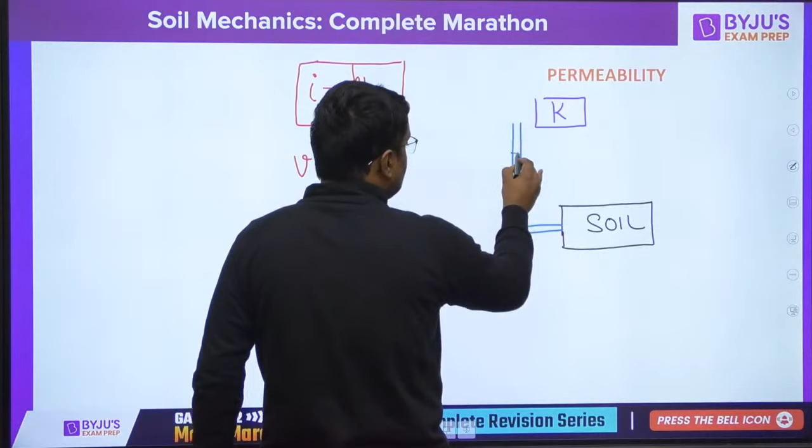Guys, suppose this is a soil sample, and the soil sample is connected by a water head here. Suppose the head of the water is H1, the height is H1, and here suppose the height is H2. So there is a head difference. Here the energy is more, H1; there the energy is less, H2.

See how the energy is more, sir. I am not getting, sir. Suppose let us take this as datum. Let this be datum. So consider any point, let it be this point. So velocity head is always 0.

Velocity head in soil is always 0, because if it is at rest, velocity is 0. If it is moving, then velocity is very, very small, not like Usain Bolt - velocity is very small, about 10 to the power minus 8 meter per second. So velocity head is 0. Even if it is moving, in soil we always take velocity head as 0. Datum head, the height from datum, is 0.

Pressure head - see how much is the pressure? Gamma H1, so pressure head is H1. So total head here is H1. Okay sir, got it sir.

Similarly, at this point, velocity head is always 0 in soil. Datum head, height from datum, is always 0. Pressure head here is H2, height of water is H2, so pressure head is H2, total head here is H2. So total head here is H1, total there is H2. Water will flow from H1 to H2.

Water will flow from H1 to H2 - sorry, from this point to this point. Why? Because there is an energy difference. Here head is H1, there head is H2. So there is an energy difference, therefore water will move.

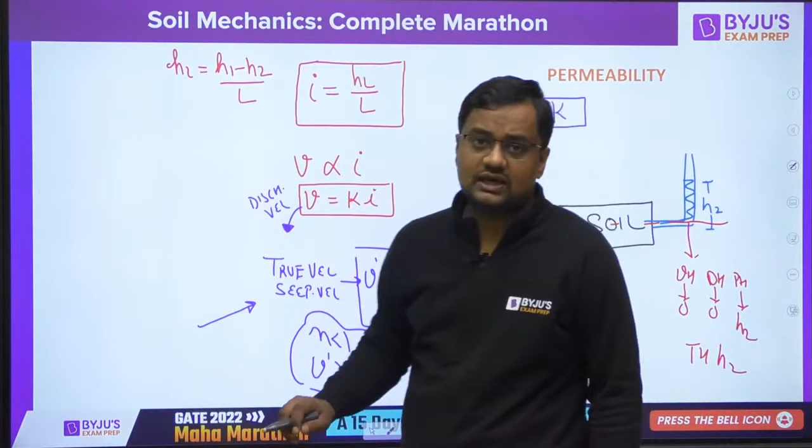What is the difference between the two? Guys, discharge velocity is actually discharge by total area. Real velocity is true velocity, because actually the true velocity is discharge by... if water is not flowing from the whole area.

Water is not flowing from the whole area - water is only flowing through the voids. If this whole area is not empty, this is not a pipe, the whole area is not empty, water is only flowing from the voids. So it is Q by area of voids.

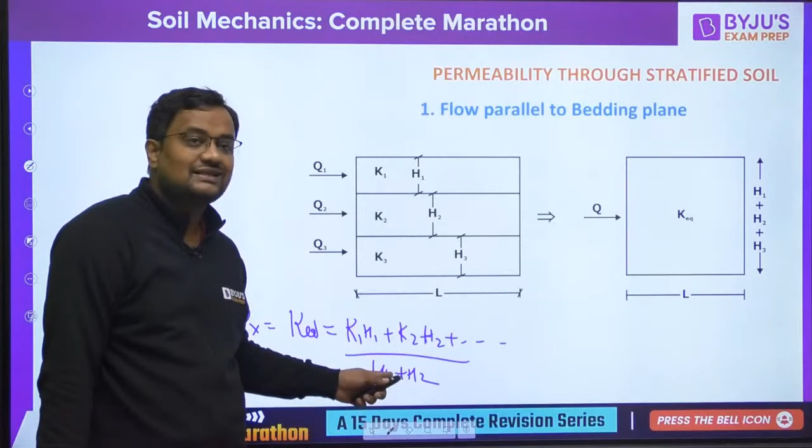This is Ky, and always, Kx is greater than or equal to Ky. Parallel is always more than perpendicular. Why? Because parallel is something like an arithmetic mean: K1 plus K1 plus K1... H1 times, plus K2 plus K2... H2 times, upon total number of terms, that is just like an arithmetic mean. And here it is a harmonic mean. So arithmetic mean is always greater than or equal to harmonic mean.

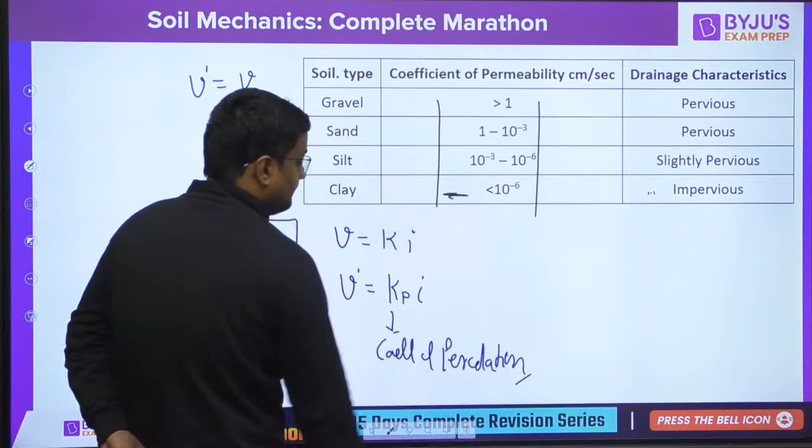So if we are relating V, that is discharge velocity, which is discharge by total area, and V dash, true velocity, is discharge by area of voids. If you are relating discharge velocity with I, that gives coefficient of permeability. And if you are relating true velocity with I, that gives coefficient of percolation.

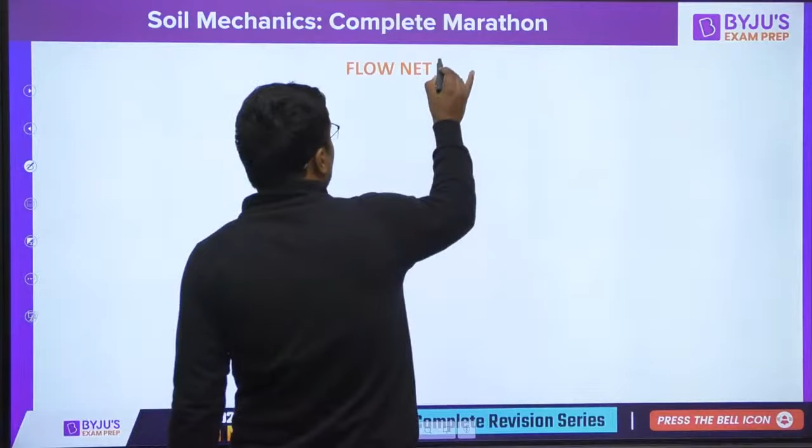Now flow net, very important, and as it is very important, I am deriving it. I am showing you the complete figure, please be patient, please listen very carefully. First of all, before flow net, let me tell you one more thing here.

Critical gradient is equal to G minus 1 upon 1 plus E. What does this mean? At this gradient, if there is upward seepage, sigma bar net is equal to sigma bar plus or minus HL into gamma W, plus for downward seepage, minus for upward seepage. Please understand the whole mystery that I'm telling you here.

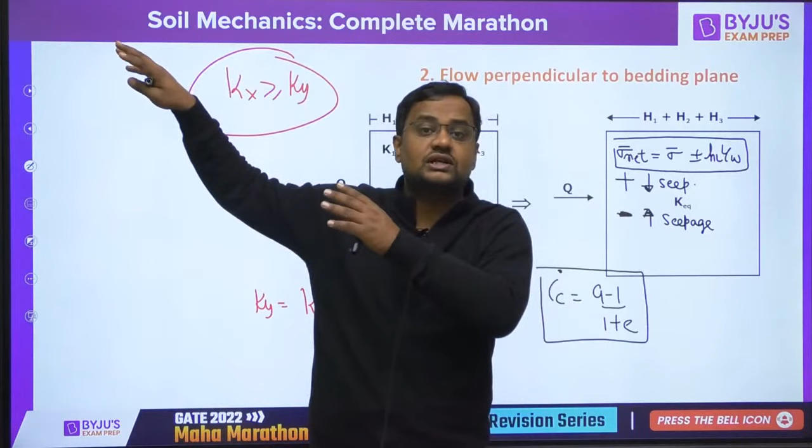Guys, this sigma bar is what we studied yesterday when there is hydrostatic condition. When there is hydrostatic condition, this sigma bar is the effective stress at any point. Or I can write sigma bar old under hydrostatic condition. When water is moving or when there is seepage, then effective stress is not the old one.

See, guys, suppose there is ground level and suppose there is water. Suppose gamma sat is equal to 20, gamma w is equal to 10. This is 2 meter. Everybody please reply. What is the effective stress at point P? Gamma sat 20, gamma w 10. This is 2 meter. So gamma submerged will be gamma sat minus gamma w, it will be 10.

Now effective stress at point P is equal to gamma submerged 10 into 2, that is 20. This is right when no seepage, that is hydrostatic. And this answer will be wrong in seepage condition. In seepage you cannot write effective stress 20. So gamma submerged into H, 20, is correct when there is hydrostatic condition. Unless nothing is mentioned in the question, you have to assume hydrostatic. If there is seepage, the answer is not correct.

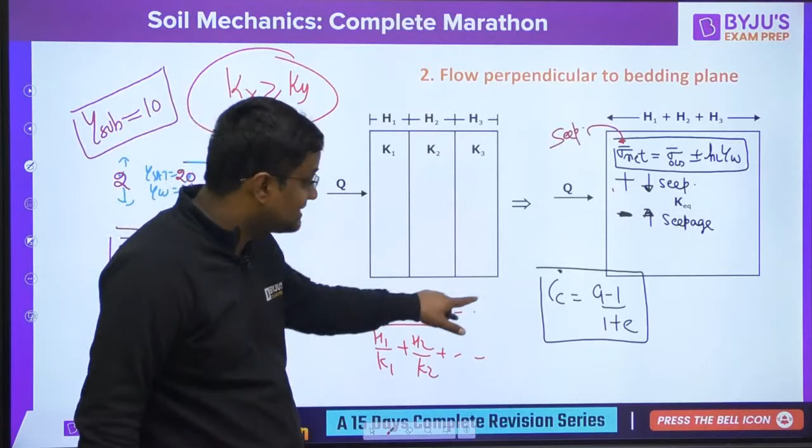And at this gradient, I am not going in derivation, effective stress is 0. So there is no contact, quicksand condition. That time, effective stress is 0. Quicksand condition, piping failure, anything. And factor of safety is critical gradient by this. Okay, now coming to here, everybody, very, very important.

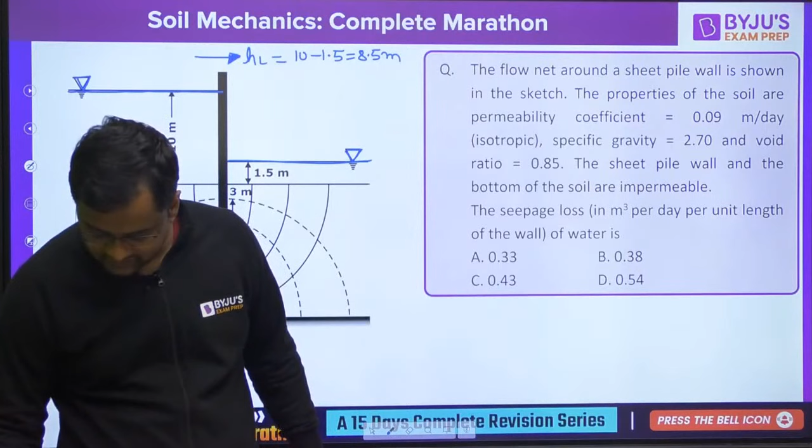Let me explain you here in this figure only. Suppose there is a sheet pile and water level here is this much and water level here is this much. So there is a head loss of how much? Here 10 meter, here 1.5 meter. So head loss of 8.5 meter. Getting or not? Everybody got it? Great. So whenever there is head loss, water will move.

Guys, not only water, everything in this universe goes from high head to low head. So from high head to low head, water is moving, like this. Water is moving. So these are flow lines. Let me make that with a different color. These are flow lines.

So number of flow lines are always 2 extra. See, this also you have to make a flow line, and this also. So these are flow lines, and number of flow fields. So number of flow lines are how much? 1, 2, 3, 4, 5. So this is 5 minus 1 is equal to 4, number of flow fields, that is NF. Or either you don't want to see in this way.

Yes, Shakti. Yes, Shakti.

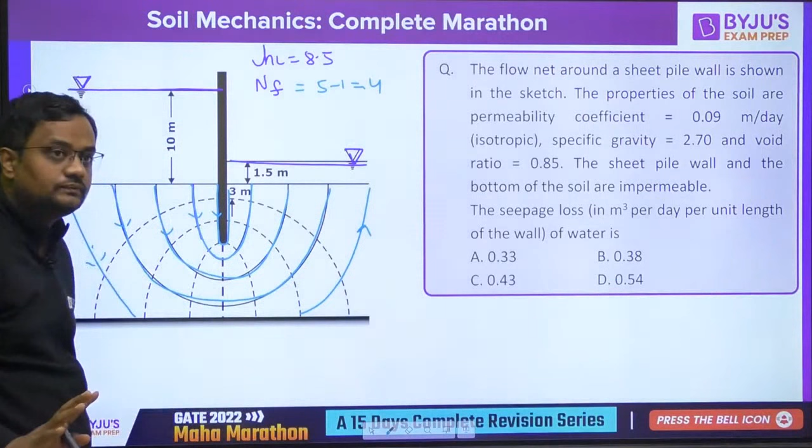Lines is 1 flow line. Water is going here now from high to low pressure, high head to low head. Water 1, 2, 3. Make 2 extra. Here, and this extra. So 1, 2, 3, 4, 5. 5 minus 1 is equal to 4. Either this way you can do, or another way is 1 water going from here, here. 4 ways. Number of flow field 4.

Equipotential line. Make 2 extra. This and this. So number of equipotential drop. So lines are 1, 2, 3, 4, 5, 6, 7, 8, 9. So 9 minus 1 is equal to 8. Or another way is from here to here 1 loss, then second loss, then third, fourth, fifth, sixth, seventh, eighth. 8 loss like this. Any way you can do. Understood everybody?

Now the question is the seepage loss. The seepage loss is given by K into H into NF by ND. K is given. H is 8.5. NF and ND is given. Calculation, I am not wasting time. PM, you can see my seepage chapter. I have taken the most complex problems and I have solved them by 3 methods. You can see that there.

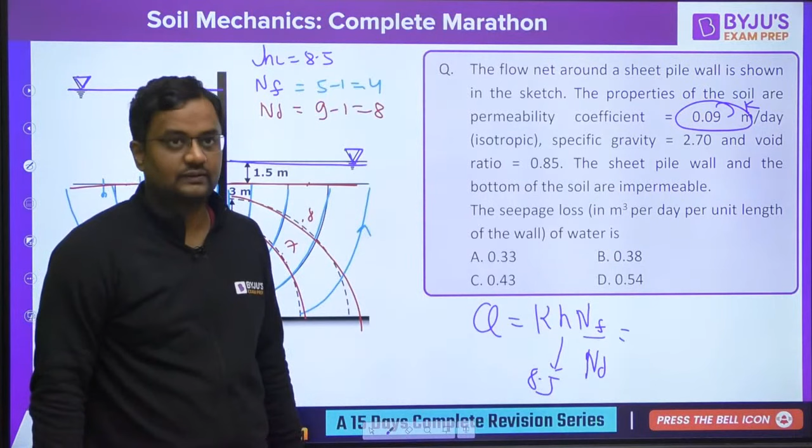Have you understood, everybody? Okay, whatever is the answer coming. Any doubt? Enjoyed the Flownet? That whole jal, that whole net is called Flownet. That is obtained from the solution of the Laplace equation. Everybody, have you understood all?

Enjoyed? Now this one, the value of critical hydraulic gradient. IC is equal to G minus 1 upon 1 plus E. IC is always equal to 1, guys. Not exactly, but around 1. Why? If 1 is not coming in your exam, that means you are doing some mistake. I am very sure that it will be around 1. How am I very sure?

Because see, G is around 2.6 to 2.7 and E for sand is around 0.6 to 0.7. So here 2.6 minus 1 is around 1.6 and the denominator is also 1.6. That's why, guys, it will be around 1. Everybody, please let me know, have you enjoyed or not? Understood or not? Any doubt?

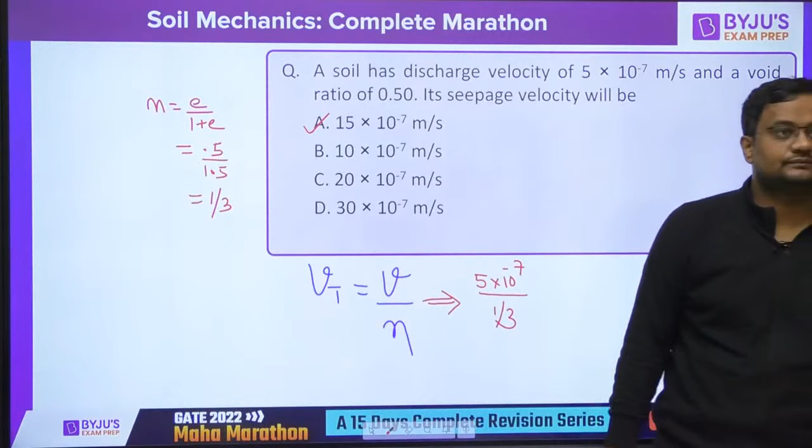Excellent. Excellent, friends. Okay. Any doubt if anybody is facing here?

So guys, what we have done till now: effective stress, compaction. Vertical stress, see, two chapters that are very less important I will not be taking in this marathon. Might be after GATE we can take them, because for GATE they are not important. Seepage, permeability, effective stress, compaction we have done. We have done proper phase diagram also. These two things I am not talking about because they are not very important for the GATE exam.

Hi Julie, after a long time you are here.

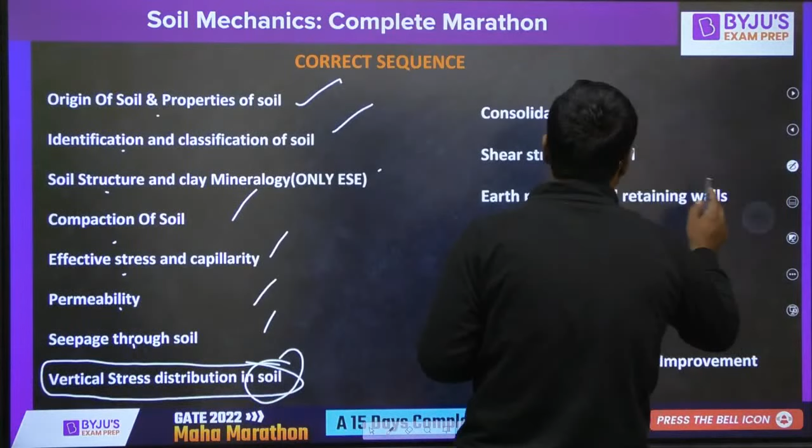Okay, so now the remaining thing we'll be doing here. Soil exploration also we will not be doing, because it's not very important; only the area ratio formula is required there. Okay, so ready for consolidation?

Should I increase my speed or decrease my speed, everybody? Please let me know. Increase or decrease? Increase, Shakti Singh. Little increase. Okay. What about others? Increase.

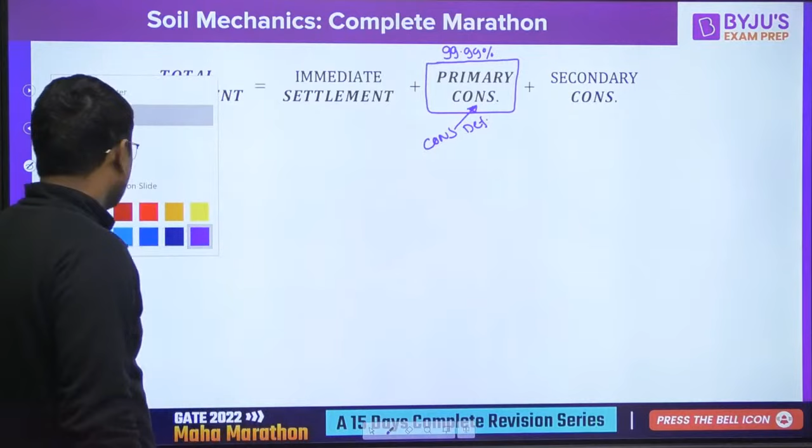Suppose this is my soil: solid, water and air. And suppose Joshi sir is putting his weight here. Joshi sir is sitting here in front of me. He is doing gym these days, gained so much muscle. So he is compressing it. Now, solid cannot be changed. There is no person in the world that can reduce the solid. So guys, some air will be compressed.

Some air will be compressed. That is called compaction or immediate settlement, SI, or immediate settlement.

Now if Joshi sir is with his friend, important friend, and they are putting more weight, let me just correct it. Okay, Joshi sir? Now, where is pink color? Okay. So let it be now more weight. So more weight now. So this air void, theoretically, I am assuming all air voids have gone. Practically, guys, out of the millions of air voids, 1 or 2 will be there.

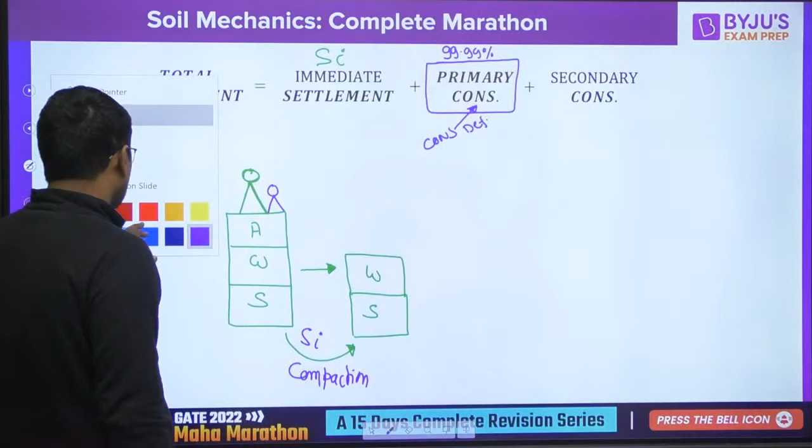So, with sufficient amount of load, practically out of millions of air voids, few will be left. You are not Rajanikanth, but theoretically I am assuming all air voids have been removed by sufficient load. So this is called immediate settlement, SI, or this is called compaction. Why is it immediate? Because the compression of air voids will take no time. Now if again some load is applied on this, now it is saturated soil.

So first step is what? Compaction. That is why in any coaching across India, the first thing taught should be compaction. That's why I told you compaction in part 1 and consolidation in part 2. In a partially saturated soil, always the compaction will be occurring first.

No. Sandhu, my favorite is Shahrukh and Nana Patekar.

So always compaction will be occurring first. Now the load is applied again. There is no air. It is saturated soil now. All load is taken by water, and water comes in excess pore water pressure, and the solid will not be changed. Excess pore water pressure develops, and water starts dissipating. So here the volume change is consolidation.

Consolidation, also called primary consolidation, that is SC, and then there is secondary consolidation, SS. So removal of air is a very fast process, compaction, immediate, and removal of water is consolidation, that is a slow process. Compaction is immediate. Consolidation will take 3 years, 4 years, 5 years, 6 years, 7 years. Consolidation will take much time.

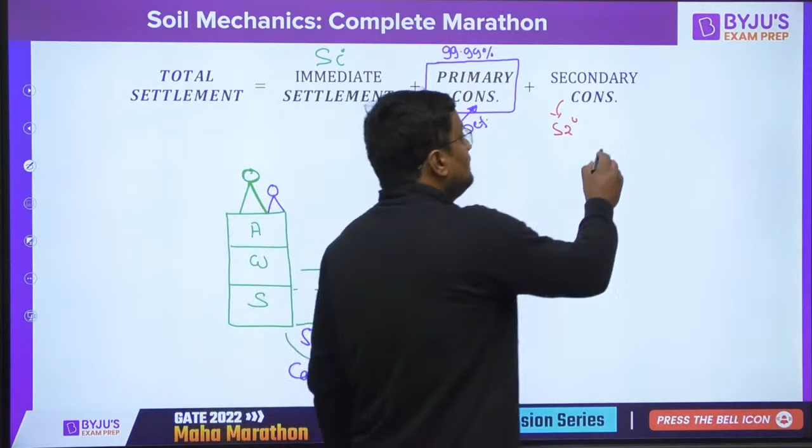Why will consolidation take much time? Because the water moving speed is 10 to the power minus 7 centimeter per second, 10 to the power minus 9 meter per second. Very slowly water is moving, not like Usain Bolt clearing 100 meter in 9.6 seconds. So here this settlement is consolidation. Then what is secondary consolidation? That is only feasible in plastic soils, and it is rearrangement of particles.

Guys, have you ever gone to a village? Joshi sir, have you ever gone to a village? Yes, Joshi sir has gone. In the village, when you take wheat, you go to the, what do we call chakki in English? Mill. Okay, a mill or something to crush the gehu, the wheat we obtain from the farms, to produce flour.

Suppose we put that in a sack, in a poly bag, and we are not compressing it, we leave it as it is. Due to its self weight the particles will rearrange, that is secondary consolidation. Due to self weight particles will rearrange in a denser form.

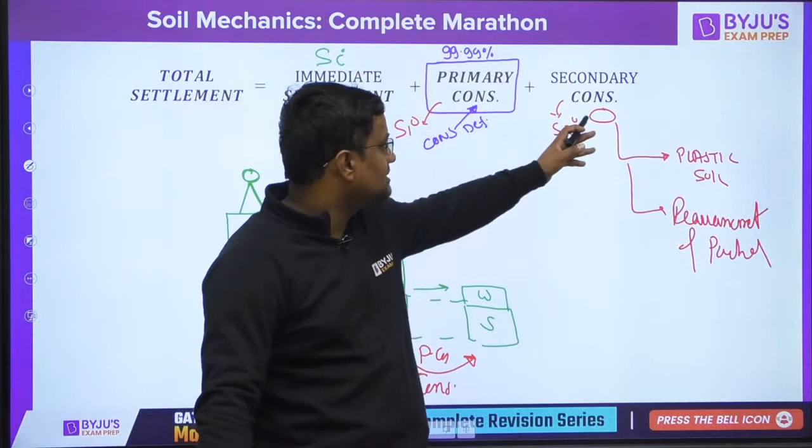Guys, these things have an empirical formula that is never going to be asked in GATE. Out of the last 30 years, it was asked 0 times, and this one 1 time. So whatever I am telling you about consolidation after this, everything is primary consolidation, that is removal of water. That is the formula for immediate settlement, that is compaction, but that is not at all necessary.

So guys, in SOM, every time we assume the material is homogeneous, isotropic, and Hooke's law is valid. Similarly, in soil, we assume soil to be semi-infinite. We always measure the depth of clay, depth of sand, depth of gravel. We never measure the area.

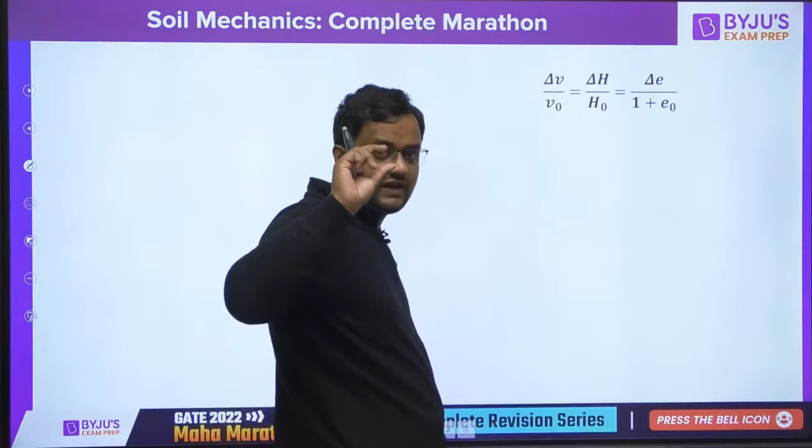Now the NCC soil. What is NCC soil? NCC soil means earlier in the soil a very thin person was sitting, and now suppose Great Khali is sitting in the present, and the past was a very thin person. That is NCC soil. NCC soil means today's stress is maximum. So OCR value is less than or equal to 1. Present stress is more.

OCC soil means in the past Khali was sitting, and now past stress is very much and today's stress is very less. And OCR value is greater than 1. The maximum stress in the past is more. Okay, what difference this will make, I'll tell you.

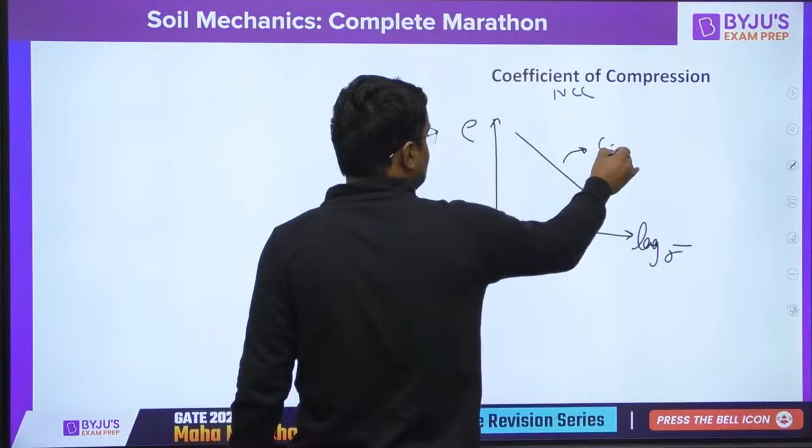Coefficient of compression, guys: if we make the same thing with log scale, then for NCC soil this is a straight line and its slope is CC. Guys, what is the difference for OCC and NCC? For OCC soil, the graph will be like this, and the slope is CR. OCC soil means the maximum stress has been applied in the past, and today's stress is very less. So it will not cause much settlement. In NCC it will cause settlement, because the past was very less.

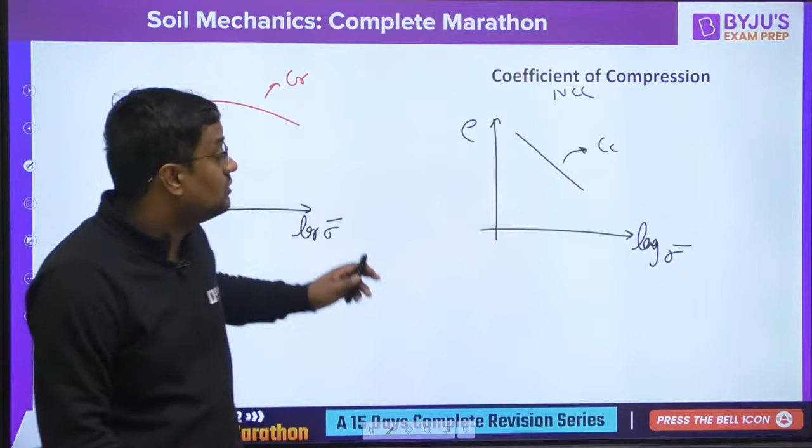And see, in this bag you fill wheat, and a very small kid, a 3-year-old, is applying the force; it will not compress much. Then I come and compress, so the settlement will be more. But if I have already applied the force in the past, and now a small kid applies force, that will not cause much settlement. Similarly, here void ratio will not change much; E is changing very slowly. Here E is changing very fast. In OCC the high stress was already applied in the past, so settlement will not be much. That coefficient is called coefficient of recompression, CR, the slope for OCC soil.

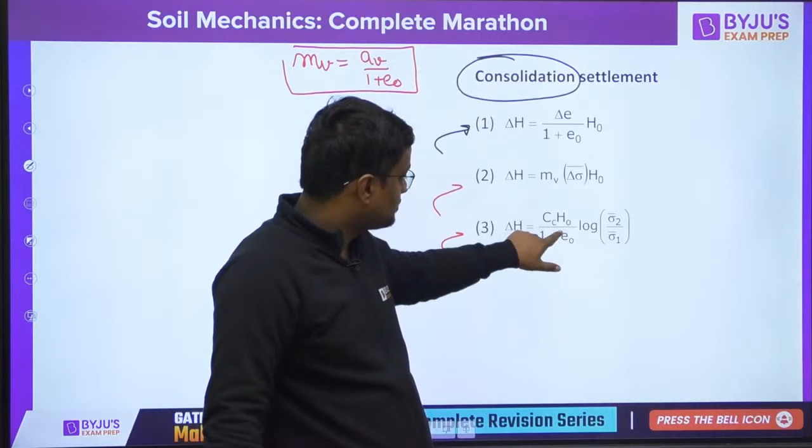Okay, so these are the formulas of delta H for primary consolidation: 1, 2, 3. Guys, what is MV? MV is coefficient of volume compressibility, equal to AV upon 1 plus E naught. Delta H is settlement, H naught is initial height, delta E is change in void ratio, E naught is initial void ratio. CC is the coefficient of compression. And the change in sigma bar has to be calculated at the center of the layer. Suppose this is a clay layer of 5 meter where I want settlement; then delta sigma bar I will take at 2.5. So these are the formulas for consolidation.

Now guys, one more thing. Since consolidation is a time taking phenomenon, if I want to find at what time what is the settlement, then TV is equal to CV into T by D square. CV is coefficient of consolidation, that is K upon gamma W into MV. From this formula 2 or 3 times questions have been asked in GATE. They have given that MV of two soils are in some ratio, permeability is in some ratio, so find CV. Very simple: CV is equal to K upon gamma W into MV.

TV is time factor that depends on degree of consolidation, capital U. Now what is capital U? See guys, if total settlement has to be 10 centimeter and it has settled up to now 3 centimeter, that means 30% is the degree of consolidation; 30% has occurred.

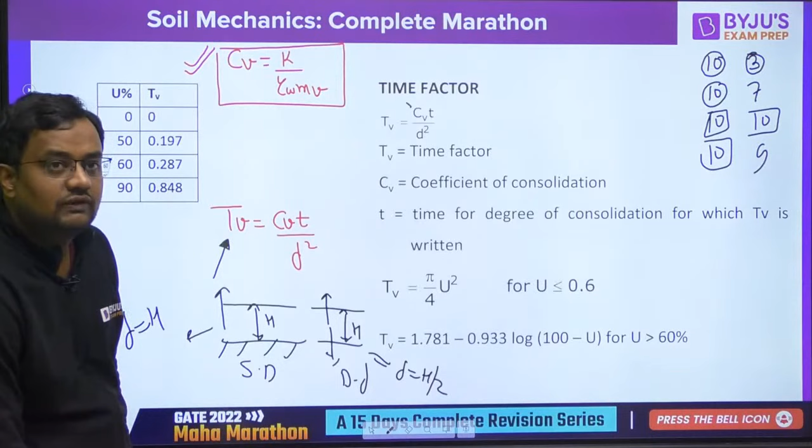If this height is H, so D here is equal to H, and D here is equal to H by 2, in double drainage. Yes, for same degree of consolidation, the TV is constant. So TV is, I told you, TV for less than 60% is this, for greater than 60% is this. CV is a thing that depends on soil. T is the time, D is the drainage path, single drainage it is H, double drainage is H by 2.

Now what time is this? Guys, if you are writing TV for 30% degree of consolidation, this time is the time for 30% settlement to occur. If TV you are writing for 80% degree of consolidation, so this time will be for 80%. If this TV you are writing for 90% degree of consolidation, putting 90 here, so this time will be time required for 90%.

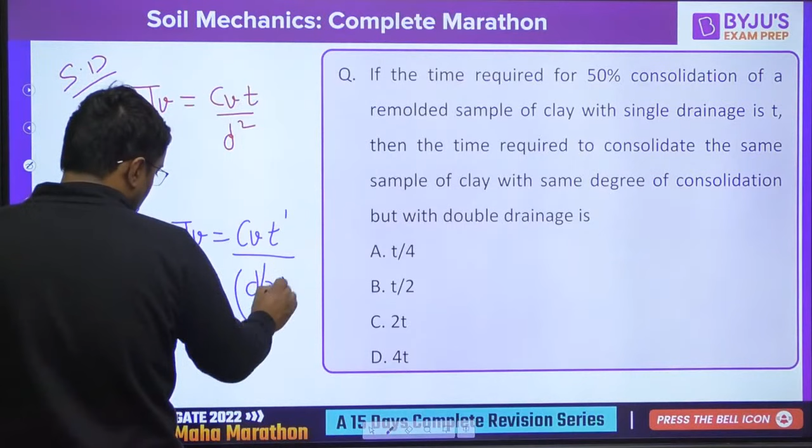TV is equal to CV into T by D square, when single drainage. Okay, that is single drainage. Now double drainage, TV is equal to CV into T dash by D by 2 whole square. Okay, now...

Everybody see, this will be 4T here. Okay, T dash will be T by 4. Double drainage time will require less, not 4T. Santu, it will not be double drainage time 4 times more. Double drainage time will be less, na? Wrong. Everybody is saying wrong answer. Sagar, Aman, wrong. Grishma, wrong. Santu, wrong.

Guys, in double drainage time you are saying more. In single drainage time is T. In double drainage time will be more. Naresh Meena.

Okay, great now. Okay, but guys, that is not very simple, na. It is not always like this, very simple. It is not so simple as you are thinking.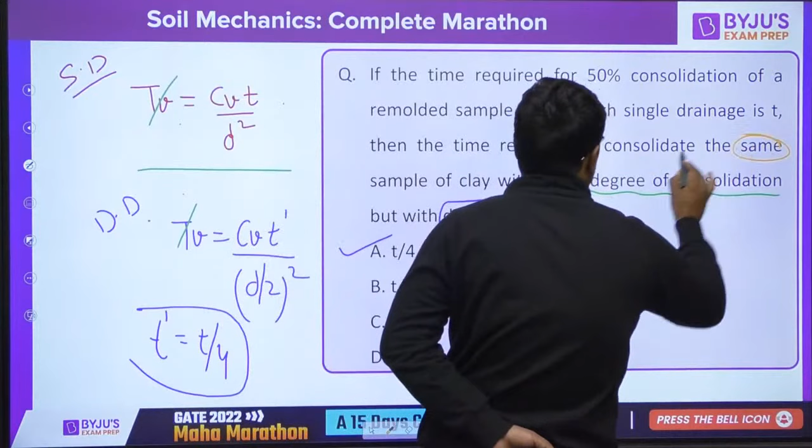Guys, here when you divide this thing, when you divide this and this by this, when you divide this by this, then since it is same degree of consolidation, since you have written this, that's why TV and TV is cancelled. Since you have written same sample, that's why CV and CV, because CV depends on soil. Okay?

So same sample means CV is also same and depth is also same, D and D. So always it is not T by 4 or 4T, it is not like that.

If here it is written as 60% consolidation and here it is 50% consolidation, here it is 60% consolidation, the answer will not be T by 4. If here it is 50% consolidation and here it is written 70% consolidation, the answer will not be T by 4. Then you have to make TV by pi by 4 U square here, and TV for 70% consolidation differently.

Understood my concept or not, what I want to tell? That is, it is not always that in double drainage it is T by 4 or single drainage is 4T. It is not as simple as that. Have you got it, guys?

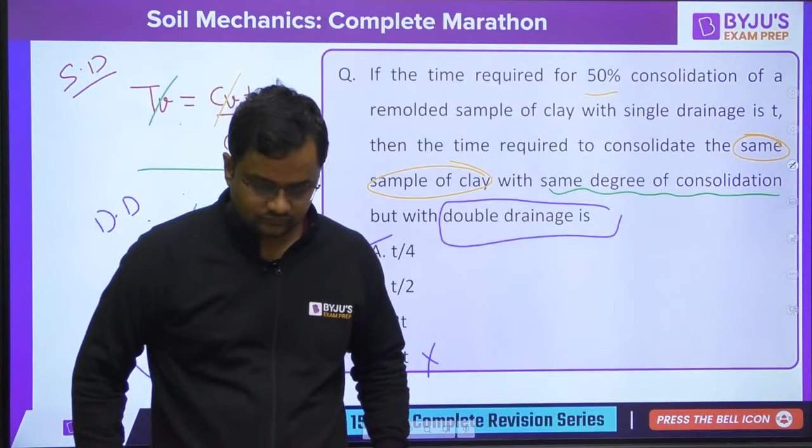Okay, so enjoying, guys, till now? Enjoying, guys, till now?

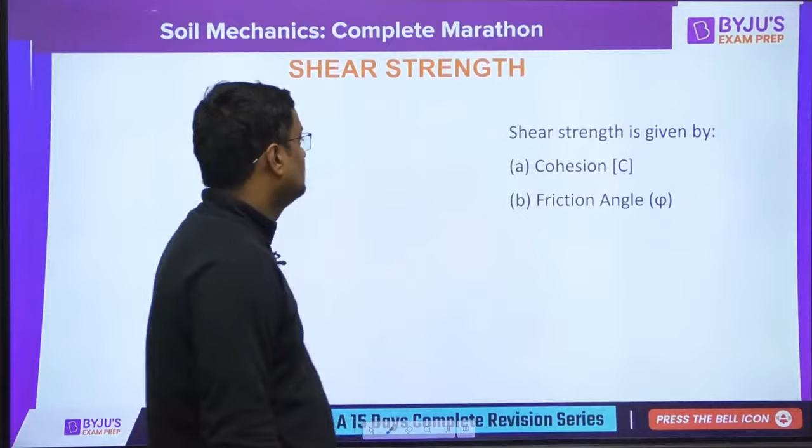Now, these landslide failures you always see — all these are shear failures, shearing of one wedge over the other. All these failures are shear failures.

So shear strength is given by C and phi: C plus sigma tan phi, or C dash plus sigma bar tan phi dash. If you have C and phi as total stress parameters, you use this. If you have effective stress parameters, that is C dash and phi dash, you use this, and this is a little bit more accurate. If you have everything, you should apply this.

Nothing to worry — when I was in college, I also didn't understand the difference between C and C dash, or between phi and phi dash. I also didn't understand, but let me explain it to you, you will understand.

Now, for clay, phi is equal to 0. Clay has a flaky shape, so there are not many angular things, so phi is 0 — there is no interlocking. So shear strength is equal to C.

Shear strength is equal to C for clay. For sand and NCC soils, since NCC soils also behave as sand, C is equal to 0. So tau is equal to sigma tan phi, or sigma bar tan phi dash.

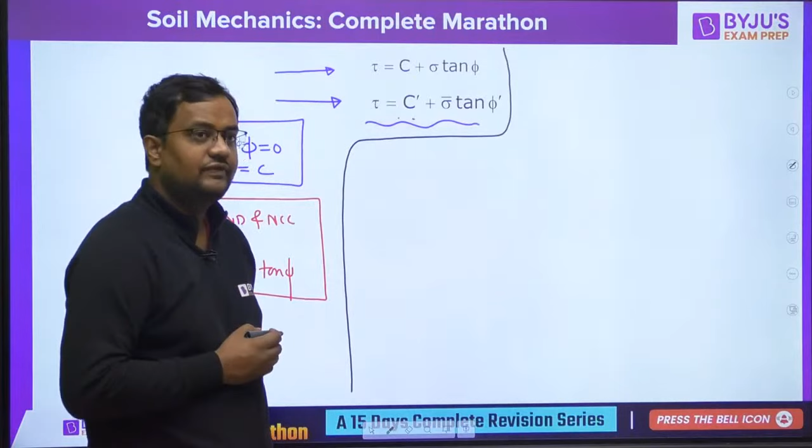Now, friends, please see, C and phi can be different for the same soil under different conditions. Let me tell you. Suppose this is soil and you are applying a confining stress from all around, upward, downward, everywhere. That is sigma C or sigma 3, spherical conditions. Now to break this, you apply sigma D extra, only in the vertical direction. The total becomes sigma 1.

Sigma 1 is equal to sigma D plus sigma 3. This green stress is from all around. Sigma 3 is also called minor principal stress, and sigma 1 is also called major principal stress. Now this sample becomes something like this. Sigma 3 was acting from all around, but we apply sigma D extra from the top, so sigma 3 plus sigma D is equal to sigma 1.

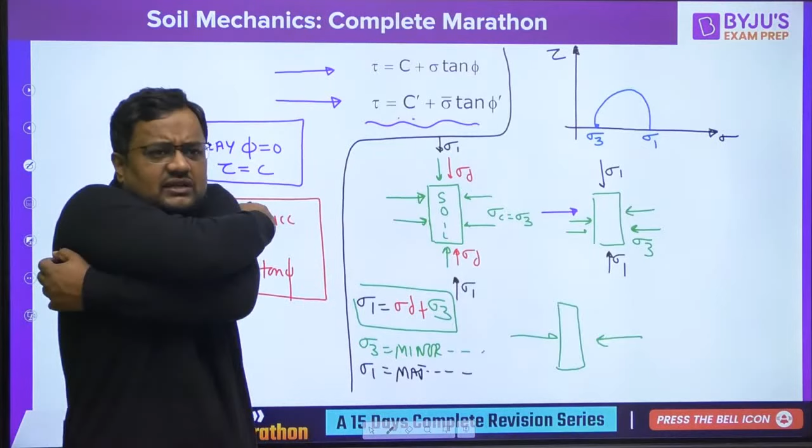Now take another sample with a bigger sigma 3. Hold it from all around, more sigma 3. You are holding it more tightly, so now more sigma 1 is required to break it. Since sigma 3 is more, more sigma 1 is required to break it.

Now if you draw the tangent of these two circles, that line is tau is equal to c plus sigma tan phi. C is the intercept and phi is the friction angle. If you work with sigma 3 and sigma 1 in total stress, the intercept and angle will be c and phi. But if you work with sigma bar 3 and sigma bar 1, the values obtained for the same soil will be c dash and phi dash.

Getting or not? If you work with sigma 3 and sigma 1 in terms of total stress, the values obtained are c and phi. If you put sigma bar 3 and sigma bar 1 in the graph, the values obtained are c dash and phi dash.

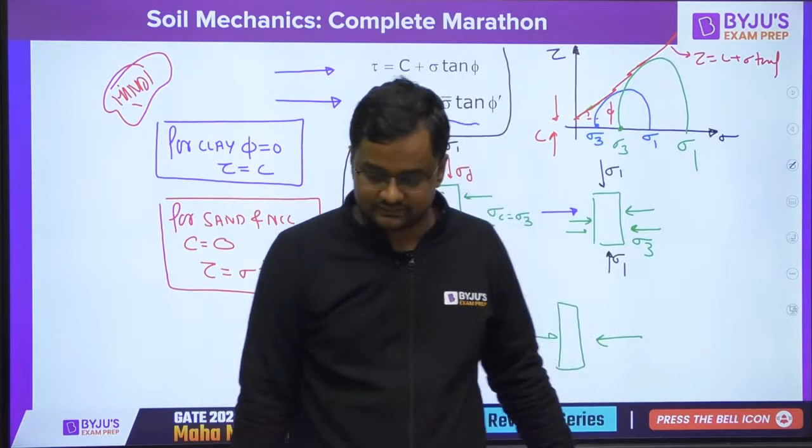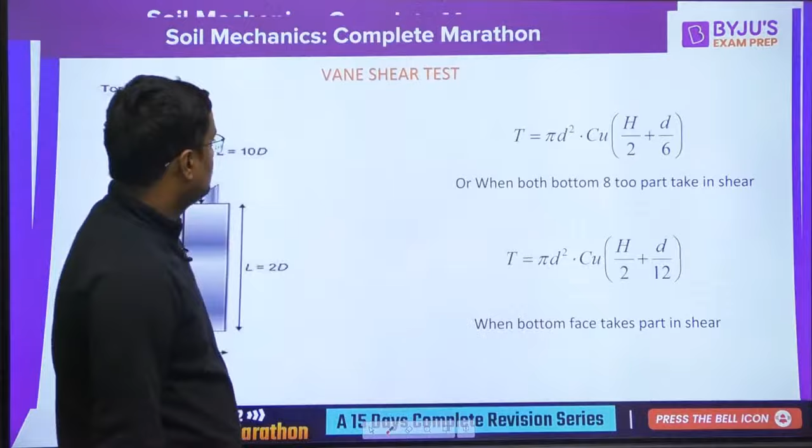Okay, so the vane shear test is also not very important for GATE. Guys, see, for those soils where I can bring the sample from the field to the lab, the properties are not changed much. That's okay, but if there is very sensitive soil and the properties may get changed, in that case, everybody, we have to do testing in the field itself. That is a vane shear test.

Suppose the soil is very sensitive. If you bring it to the lab and make a sample, the properties will change, then what is the use of finding C and phi? So do the test in the field. This is inserted in the field, and T is the torque required to rotate it. D and H are dimensions. From here you can find Cu. Cu is cohesion here. Okay.

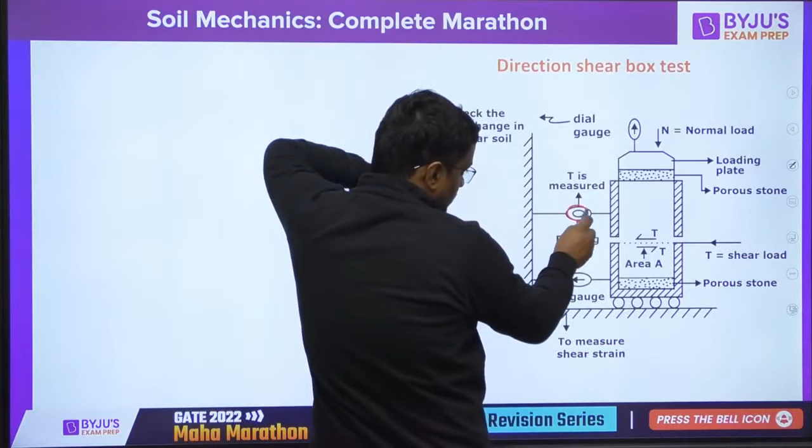Now, direct shear box test. It is suitable for sand. We put sand here, and we shear it off like this. Here we are providing the load, and we are shearing it off like this. So normal load is applied from here.

Now how do we do this? We make a graph of sigma and tau. We apply some normal load, N by A, and here T is measured. With T it fails, so one point is obtained. Normal load we applied, 30 kg, and with T load it failed, sheared off. So one point is obtained.

Now another sample is made of the same soil. Now a bigger N by A is put. Bigger load, now it is compressing more. If we compress it more, then more T is required to fail it. So bigger N by A, bigger T by A. So if you join, since sand is C equals 0, it will start from origin. So this will be the graph and that will be the phi angle.

Now the triaxial test is the same that I taught you. Sigma 3 applied here and sigma 1 applied here. And guys, I'm not going into all the details of these tests, CD, CU, UU. The reason is only one thing: I have already taught this in the Hindi channel in detail.

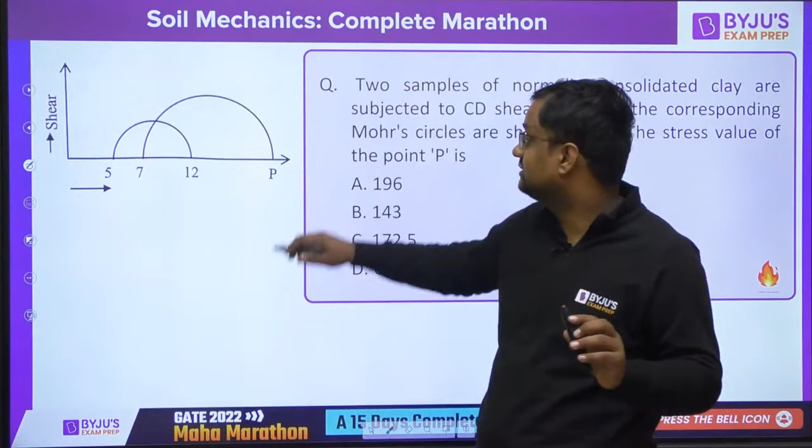Okay. Now, this has been done. This and this are not important for GATE, that's why I'm not teaching them here. Now, guys, three chapters are left: earth pressure, shallow and deep foundations.

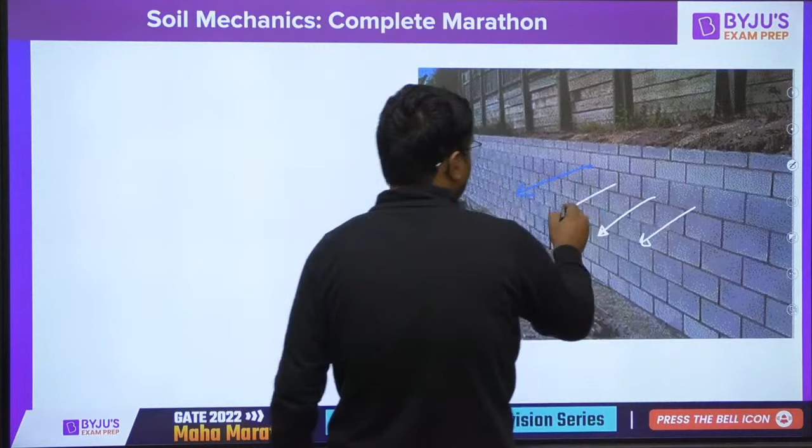Okay, guys, see, whenever I'm making a retaining wall, some load will be acting on this, like this, due to the soil. So here I am finding the lateral load, not the vertical load. The vertical load is found in the vertical stress chapter, that is Boussinesq and all that.

Why do I want to find the lateral load? Yes, Prakash, if you ask what is the most important topic in slope stability, that is Taylor's stability. Is that chapter important? The answer is no. But within that chapter, yes, Taylor's stability is important.

Now, this load I want to find out. This soil is there. Why do I want to find this lateral load? So that accordingly I will design the thickness of this retaining wall. Why these weep holes are made, I have already told you.

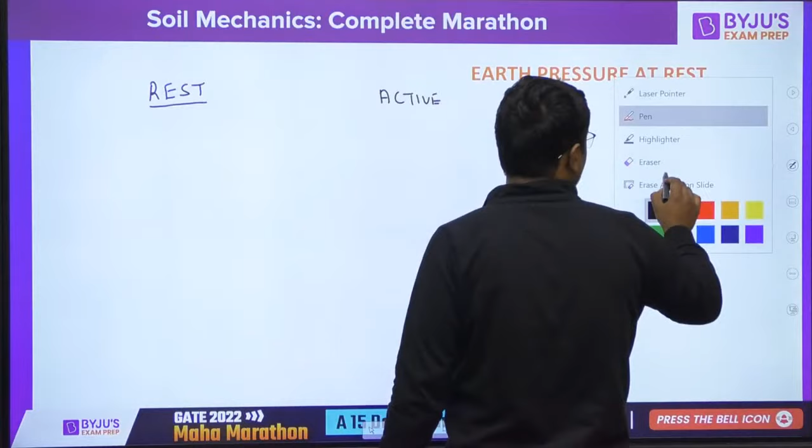Now everybody please listen to me. Here I am making the at-rest case. Here I am making the active case. Everybody please see. Joshi sir, you also please see. This is the passive case. So this is at rest, this is active, this is passive.

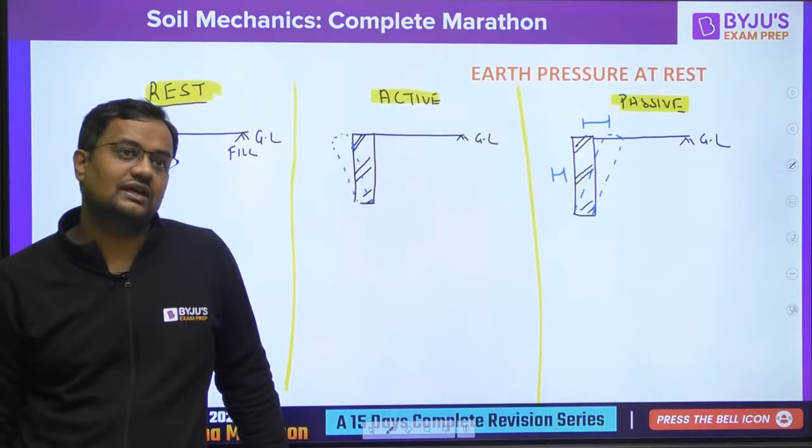Sir, first question. Sir, why is it coming towards the fill? Guys, there are other forces other than soil also, like wind forces, earthquake forces, inclination forces, eccentric forces. Due to any such forces, like wind load or earthquake, it can come towards the fill also. That is passive.

Now guys, what is the vertical stress here? That is gamma h. Horizontal stress is equal to K naught into sigma V. In rest case, it is K naught, the earth pressure coefficient at rest. So sigma h is K naught into sigma V, and K naught is equal to 1 minus sin phi. This is the horizontal stress at any point. Vertical, you know, is gamma h; we have done it in the total stress chapter.

Similarly here, if this is sigma v, vertical stress, what is the horizontal stress? Horizontal stress is active earth pressure coefficient Ka into sigma v, that is 1 minus sin phi upon 1 plus sin phi into sigma v. See, this value is less than 1. Numerator less, denominator bigger. So here sigma h is less than sigma v. So this is minor principal stress here, and this is major principal stress here.

But guys, this formula is not the general case. General case is sigma h is equal to sigma v into 1 minus sin phi upon 1 plus sin phi, minus 2c root of 1 minus sin phi upon 1 plus sin phi. That is the general formula. And this one is only for c equal to 0, for sand.

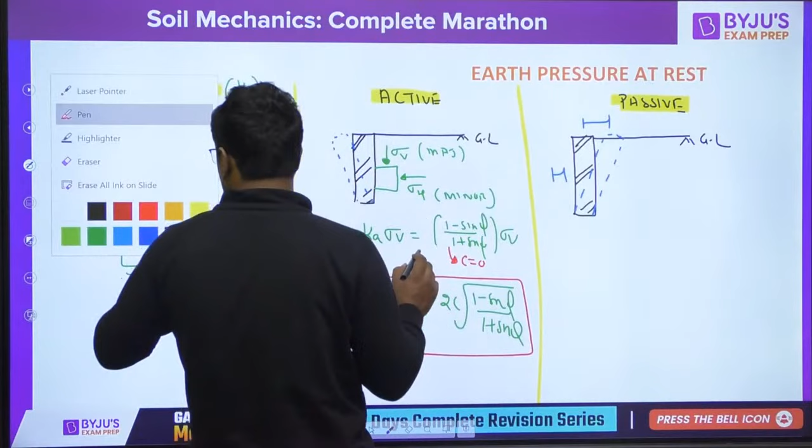Now here, everybody, if this is the vertical, that is total stress, horizontal stress is equal to Kp into sigma v, which is 1 plus sin phi upon 1 minus sin phi into sigma v. So Kp is greater than 1 here. You can see numerator is bigger than denominator. So sigma h is greater than sigma v. So this is major here and this is minor here.

And of course, guys, nobody will tell you, but Abhinav Negi is telling you by feeling: if you push the wall towards the fill, the horizontal stress will be more. If it is going away, why would the stress be more? If something is going towards the fill, horizontal will be more. Simple. But the real formula is not this. This is only for c equal to 0.

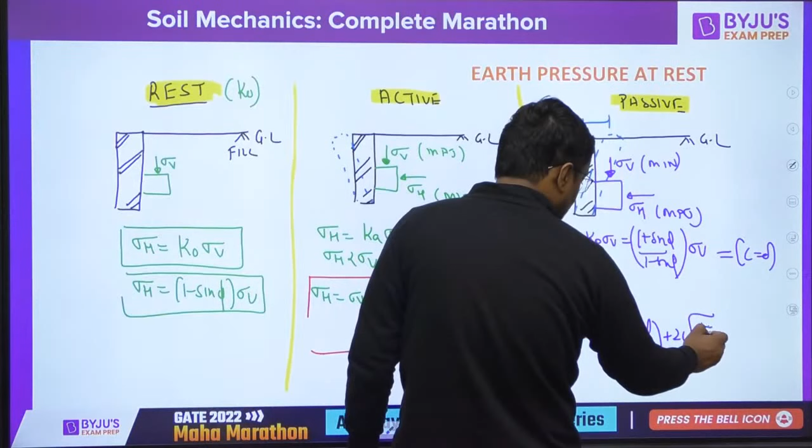The real formula is, sorry, wait. Sigma h is equal to sigma v into 1 minus sin phi, okay. And here sigma h is major. Sigma h, that is major, is equal to sigma v into 1 plus sin phi upon 1 minus sin phi, plus 2c root of 1 plus sin phi upon 1 minus sin phi. Sigma h here is major, sigma v is minor. That is the general formula here. Now those are the cases, guys. Earth pressure at rest we have done.

Okay, but let me clear the doubt of Santhu also. If water is also there, what if it is effective stress? I am explaining you with a simple case. See, Santhu.

Okay. See, if this is ground level and this height is h, here it is gamma saturated or gamma submerged, and water is also here. Now if I want to find the horizontal stress or horizontal force on this, which is the most simple case, then guys see, sigma horizontal is, let it be active case or any case, k, whether Ka, Kp, K0, anything, k into sigma v.

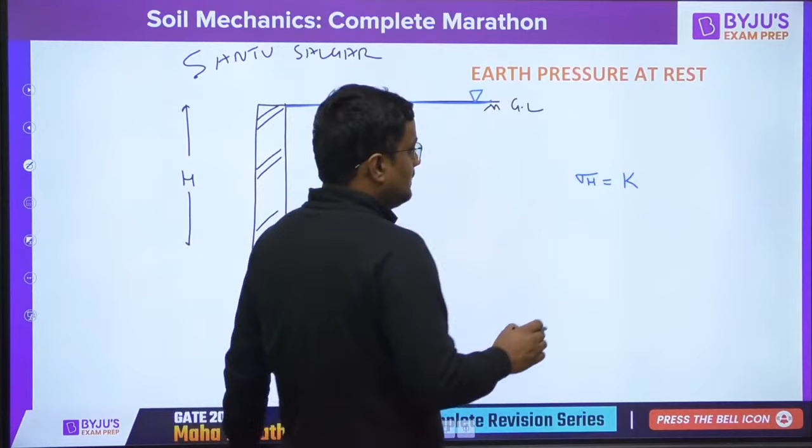Okay, now you know that sigma bar is equal to sigma minus u. So sigma h is equal to k sigma, and sigma can be written as sigma bar plus u; I told you it is total stress. So sigma h is equal to k into sigma bar v, plus u will be alone. U will be alone because

water exerts equal pressure everywhere, gamma h. Water is not like this, vertical pressure more or horizontal less. No. Water pressure gamma h is equal in all directions. So if vertical it is u, horizontal is also u. So k will be 1 for water. So water exerts exactly equal pressure in all directions.

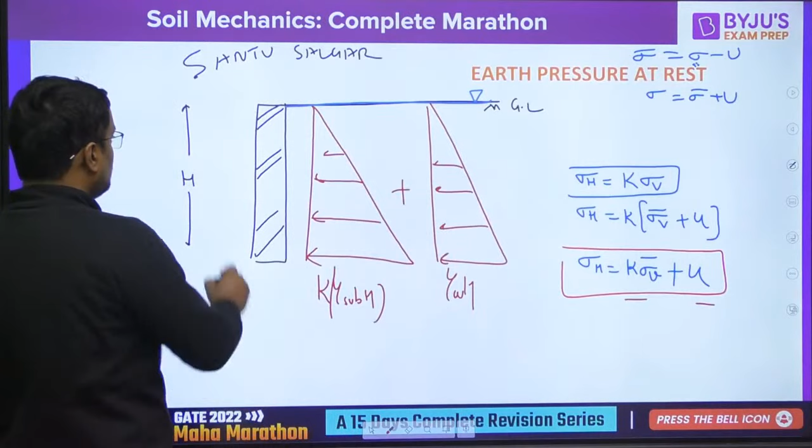So if I want to find horizontal stress, horizontal stress is this and this. So k, whatever Ka, K0, Kp, into sigma bar v, that is k into gamma submerged into h, plus water also, but water will be gamma w into h, no k. So total it will be k gamma submerged h plus gamma w h. This is the total horizontal stress, not effective.

Now if you want sigma bar h, then minus u. So this will be subtracted. Have you got it, Santu? Good, Mansoor.

Okay, unbraced cut. Guys, at what depth can we cut the excavation? After that we have to provide bracing so that it will not collapse. So what depth can we cut? That is called critical depth, and that is 4c by gamma root Ka. Of course I am not going into the derivation.

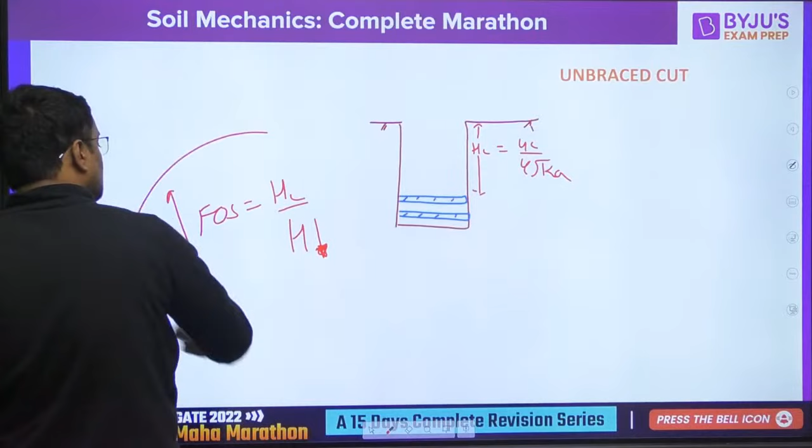Okay, so Ka value for clay when phi is 0, 1 minus sin 0 by 1 plus sin 0, is equal to 1. And factor of safety of any unbraced cut with any depth is Hc by H. If you cut to less depth, factor of safety will be more. Okay, please do this question. Everybody, every commando, every champion.

Okay. Sides caved in means sides collapsed. 6 meter is equal to 4c by gamma root Ka. It is clay, so 1 minus sin 0 by 1 plus sin 0 is equal to 1. So 4c by 20 into 1 is equal to 6. C is equal to 20 into 6 by 4, so it is 30.

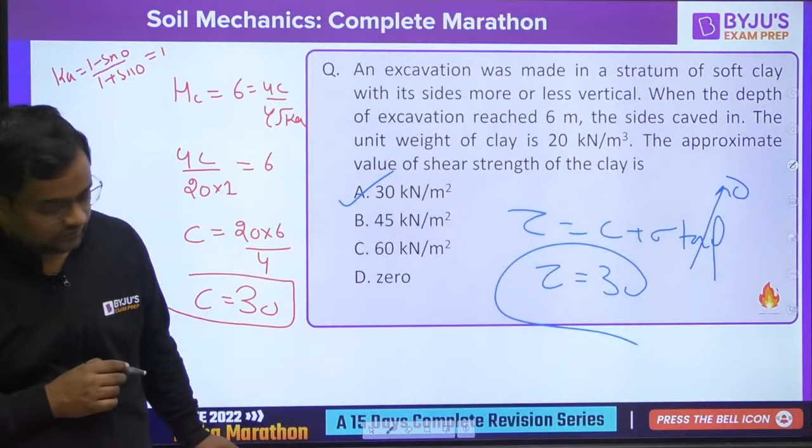And shear strength is given by c plus sigma tan phi, but phi is 0. So it is 30. A option. Have you got it, all of you?

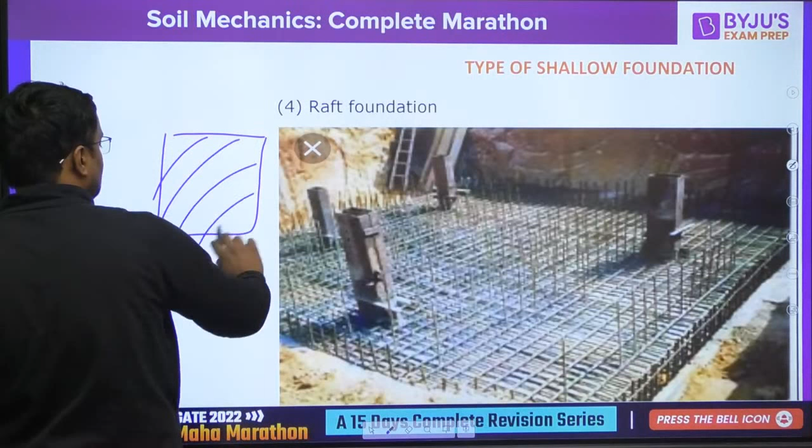Gross pressure intensity: P by B square is the load of the column on the footing, and gamma Df is the load of the soil. What is q net? q net is the load that has come extra. So earlier gamma Df was acting; now this is also acting. So what is this? That is P by B square.

So according to Terzaghi, please everybody listen to this formula very carefully, because from shallow foundation only this can be asked, most chances. Everybody please see. This is important, Terzaghi is important. If this is a footing having some load, that is the ground level, this is the Df, that is the depth of foundation. So the total load it can bear.

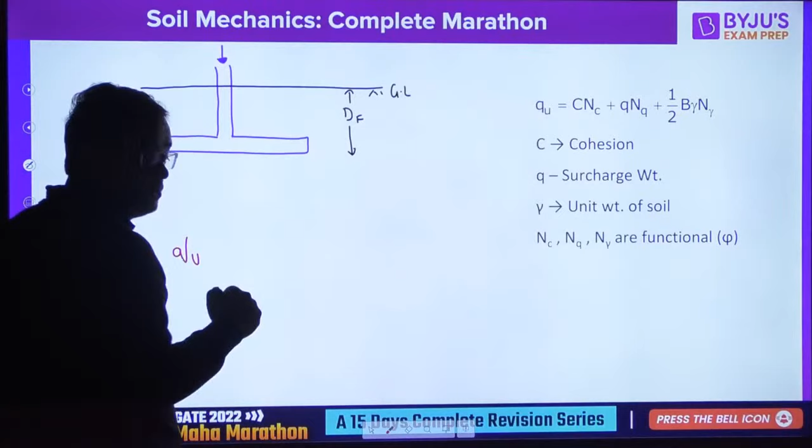According to Terzaghi, it is given by qu, the ultimate load capacity.

How am I looking like a ghost? ऐसे पढ़ा दूं? Okay, let me switch on again.

qu, the ultimate load capacity, is equal to C into Nc. C is the cohesion. Nc, Nq and N gamma, don't worry about these. They are just functions of phi, and their values will be given to you. C is the cohesion at the base. If cohesion is more, the strength is more, so more is the bearing capacity.

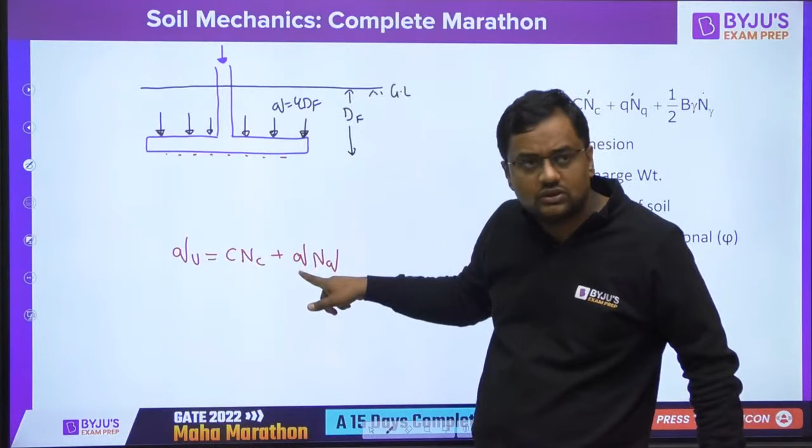Plus q into Nq. What is small q? Small q is the load acting here, that is gamma Df. Guys, if more small q is acting on this, it will be stable. It will not tilt. The soil is compressing it. So this soil is helping us to increase the bearing capacity, because this q is holding it, so it will not be tilted.

Now, Nq is a constant. And one more term: half B gamma N gamma. Take half and N gamma as constants. Now think of B gamma. B gamma is the extra stress here at depth B, because the crack originates from here. So if there is more stress of soil here, it is holding the soil, not able to crack it. So B gamma is the stress below this.

Okay, this is qu. And guys, qnu is how much? Net, I just told you. qnu is this minus gamma Df, the net bearing capacity other than gamma Df. So C Nc plus this minus q. So it will be C Nc plus q into (Nq minus 1) plus half B gamma N gamma. I hope you are getting it.

What is the difference between qu and qnu? qu is the total bearing capacity. Suppose qu is coming 100; then you can apply 100 load including the load of soil. If qnu is coming 80, that means you can apply 80 extra load other than soil. So qu is the total load including the weight of soil, and qnu is the load that can act other than the load of the soil.

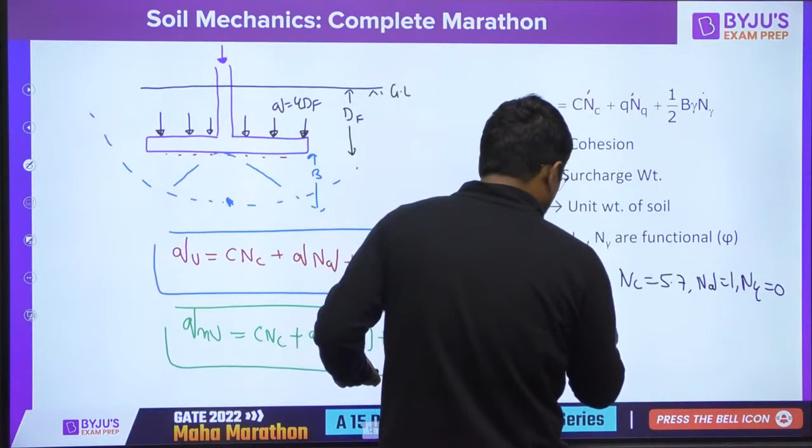Guys, if it is clay, for phi equal to 0, Nc is 5.7, Nq is 1, and N gamma is 0. Put it here: Nq minus 1 is 0 and N gamma is 0, so those terms will be 0. So for clay, qnu is equal to 5.7 C. These are for strip footings; for circular and others, modification factors are required.

Now guys, if there is a water table, then this gamma will be gamma submerged. And here this gamma is of zone 1, because gamma Df is of this soil.

B gamma is below this, so this gamma is of zone 2. Now you can do the water correction factor formula without any help. The only thing is, in water condition, you have to apply effective stress in submerged way. Here in this term, gamma should be of zone one, and the third term gamma is of zone two. Everything I have written here as well, you can see later on. These are for general shear failure.

For local shear failure, guys, if phi is less than 27 degree, in that case you don't have to work with NC, NQ and gamma. There you have to work with NC dash, NQ dash and gamma dash. All these formulas are for general shear failure. If local shear failure occurs when phi is less than 27 or 23 degree, you don't apply NC, NQ and gamma, you apply NC dash, NQ dash and gamma dash. And you apply tan phi m equal to 2 by 3 tan phi. Calculate phi m from here and find NC dash, NQ dash and gamma dash in terms of phi m.

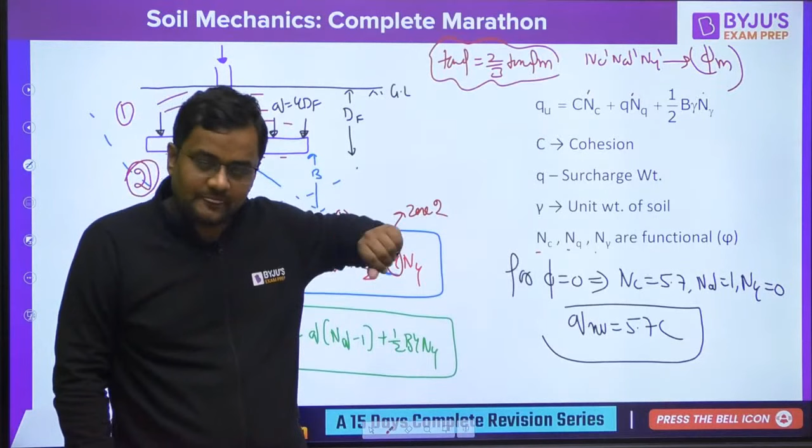Okay, suppose phi is given to you as 15 degree. Let me explain with an example. Suppose phi is 15 degree, then that is local shear failure. These formulas are for general shear failure. Then you apply tan phi m equal to 2 by 3 tan 15. Instead of C, you have to put 2 by 3 C. Calculate phi m from here. Suppose phi m comes out to be 12 degree. So now NC, NQ and gamma will not be calculated for 15, they will be calculated for 12.

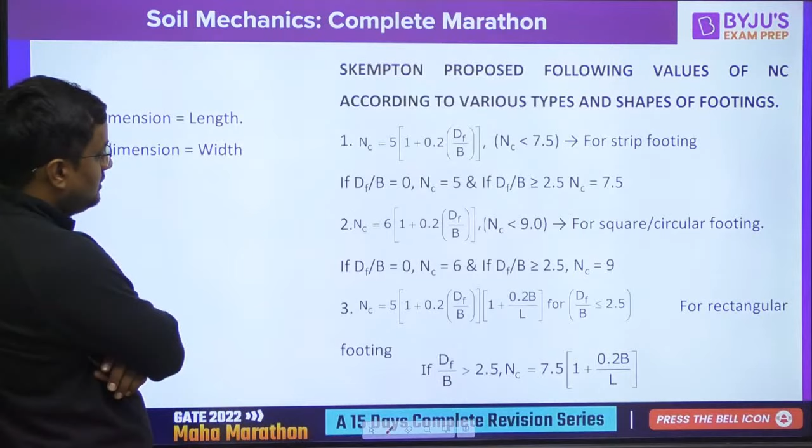Accordingly, you know that in the second term it's for zone 1, third term is for zone 2, like that. Now according to this, Skempton has given a different thing. Skempton says bearing capacity will be equal to C times NC. Simple formula. But Skempton has given different formulas for different shapes: for strip, for circular, for rectangular. Skempton has given a very easy formula: Q, bearing capacity, is equal to C times NC. Simple, only one term, C times NC. C is cohesion and NC is this value.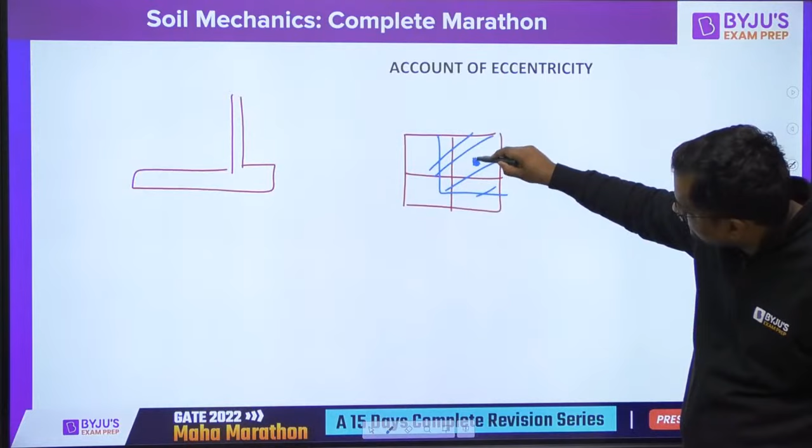Okay, more of these will never be asked in exam. Brinch Hansen is never asked in exam. Account of eccentricity is also not asked in exam. Let me tell you, suppose the load is not acting at the center. Suppose some column is like this, not acting at center, acting at some eccentricity here. So you make your area reduced, such that the reduced area, this blue one, is at the center of mass. This point where load is acting is the center of mass of this blue area. Now all calculations, all safety checks should be done on the blue area. You assume your area to be less, only this blue area. So now assume this much footing only and do your calculations for safety.

Okay, SPT test, guys. What is SPT test? We put a borehole at the depth of foundation and some load is applied on this. First 150 mm, how many blows are required - 1, 2, 3 - this is not counted. Next 300 mm is counted. First 150 mm is not taken, next 300 mm is taken, and that gives value N. In that, overburden correction and dilatancy correction is done, and refined N value is taken. That's it for competition point of view, GATE and ESE.

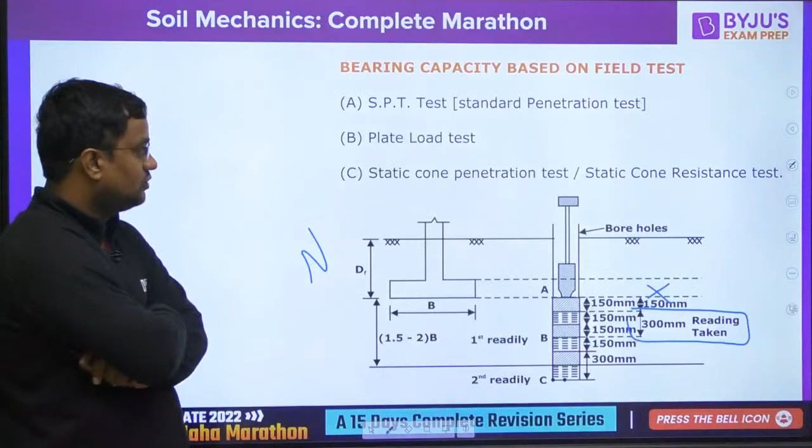But somebody may ask, sir, you are doing this first 150 mm, how many blows are required, you are not counting, next 300 mm you are counting. Then you are applying some corrections like dilatancy and overburden correction. Then sir, what is the use? Then what is the use, sir?

What is the use? I am telling you this for practical purpose, but it will not be asked in any theoretical exam. In any theoretical exam, use will never be asked.

What is the use? Let me tell you. There are formulas like Terzaghi, Brinch Hansen, and many others that give you the bearing capacity.

Similarly, there is Teng's formula also, like Brinch Hansen, Meyerhof, Skempton, Terzaghi. In Teng's formula, bearing capacity requires this N. There is a huge formula, not required for you, neither for GATE nor for ESE, in which N is required.

What I observe many times while teaching is that nobody asks, sir, what to do with this N? You get this value, say 300, what to do with it? Nobody asks. Guys, with this N we are finding the bearing capacity in Teng's formula.

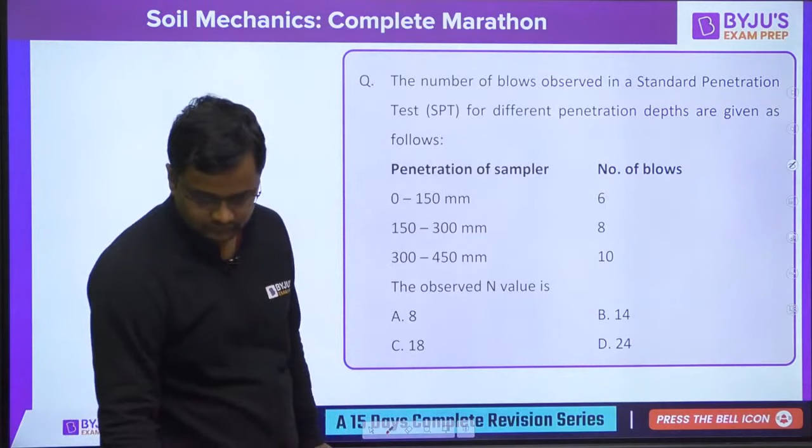That is not required. What is the value of N here? Please let me know in the comment section.

N is 18. The first 150 mm is not counted, the next 300 mm is counted, so it is 18.

Now, one more thing is the plate load test. In this test, we excavate up to the depth of foundation, we put a plate of width BP, and the excavation width should be 5 times that.

So what should be the depth of excavation? The depth of excavation should be same as the depth of your foundation, and the width should be 5 times the width of the plate.

We apply the load on this plate and calculate settlement, and also calculate how much load it can take before failure, that is QUP. So we find out settlement of plate SP and QUP, the ultimate bearing capacity of the plate.

Now we have some formulas. We actually want QUF foundation, the ultimate capacity of foundation, for granular soil. QUP we obtain from the experiment, BP we know from the experiment, BF is how much we are designing the foundation width.

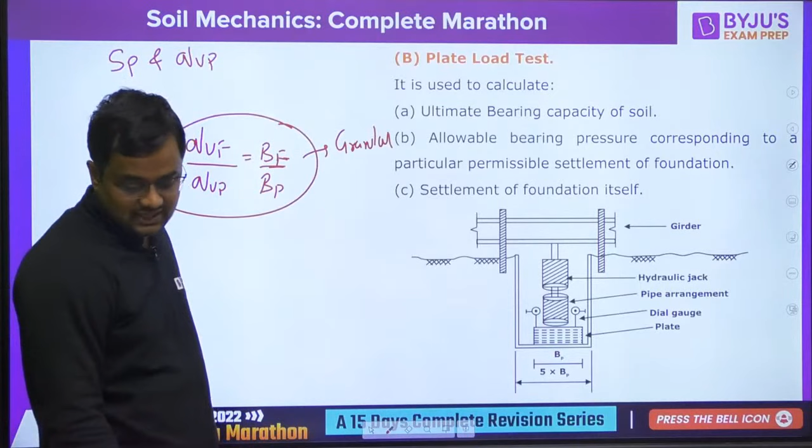From here you find QUF, and for clay, QUF upon QUP is equal to 1. Whatever load the plate fails at, the foundation will also fail at the same load.

Settlement of foundation upon settlement of plate can be found from the experiment, equal to BF by BP upon BP plus 0.3, divided by BF plus 0.3, whole square. This is for sand.

Settlement of foundation can be calculated from here. For clay, settlement of foundation upon settlement of plate is equal to width of foundation upon width of plate.

Okay, so those are the things. This is already written here. Now guys, what I told you...

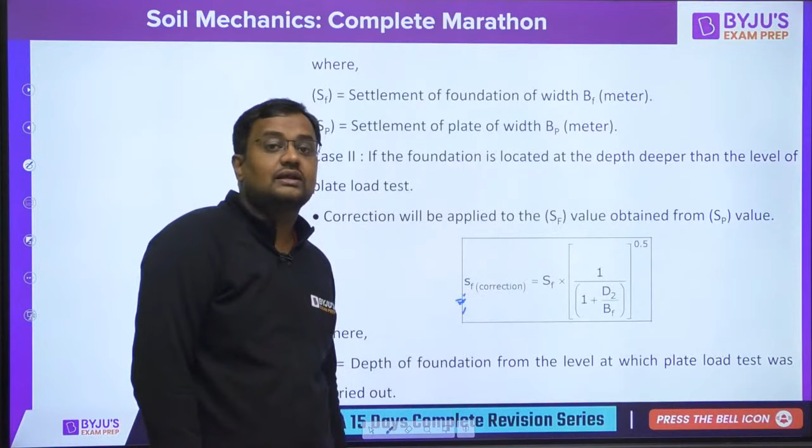If you are lazy and not going to that much depth, then a correction is required on the settlement. This correction is only needed when you are not excavating to the depth required to carry out the test.

At what depth are you going to make the foundation? You are going to make the foundation at 3 meters, but you are doing the test at 1 meter, so D2 is 2 meters, and then correction is required.

Okay, this we have already done. Now deep foundations. Deep foundation is a very easy and logical chapter.

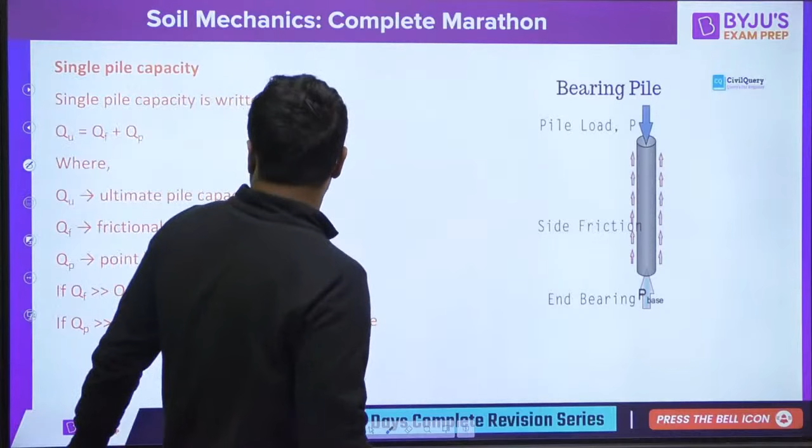Total load acting downward on these piles, how much load these piles can take, that will be total load QU. How is it calculated? QU is equal to QF plus QP.

QP is point bearing, and if the pile is going down, friction acts upward. If this is the pile and QU is the total load acting downward, QP is the point bearing capacity because from the base some reaction of the soil will be there, and also the friction.

Guys, this friction is neglected in shallow foundation. Why? Because here the area is too much, the pile is long, so QF has some significance. In shallow foundation, the area is small, not much length, so QF is neglected there.

If you want bearing capacity, Q allowable is equal to QU by factor of safety. If factor of safety is not given, take it as 2.5. So QU is the load coming, and helping resist it are QP and QF.

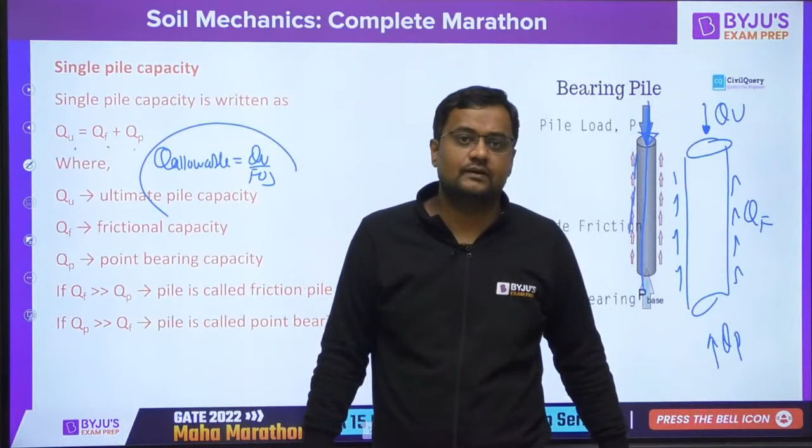If QP is very much greater than QF, it is called a point bearing pile. If QF is much bigger, then it is a friction pile. And if both are almost the same, with not much difference, then it is neither a friction pile nor a point bearing pile.

So QU is equal to QF plus QP.

Guys, you know Vibhishan. Vibhishan had to help Ravan, but he changed sides and helped Ram instead. Similarly, friction can also do something like Vibhishan. Friction can also work like that.

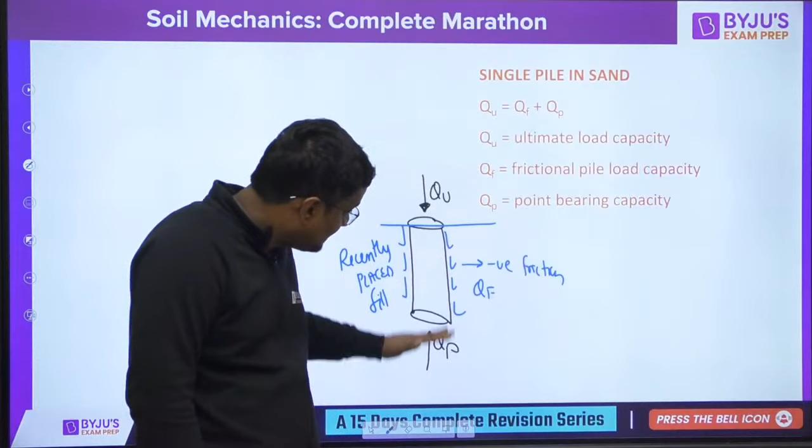This causes negative friction on QF, because the recently placed fill is going downward due to settlement, providing negative drag, a downward drag.

Friction is always opposite to the motion. Here the pile is going downward, but the soil is going more downward, since this new fill is consolidating, the pile goes down but the soil goes down at a higher rate.

So it is providing drag downward. Or you can say that with respect to the soil, the pile is going upward, because the pile's downward speed is less than the soil's downward speed. So relative to the soil, it is moving upward, and negative friction acts opposite to that motion, downward.

Either you can think of it this way, or think that the fill is consolidating and so provides drag downward. So here QF is opposite, and QP alone has to balance both QU and QF.

One more type of question asked these days: sometimes they ask pull out capacity. Can you tell me what is the pull out capacity of a pile? When pulling out, what will be resisting it? Is it QP?

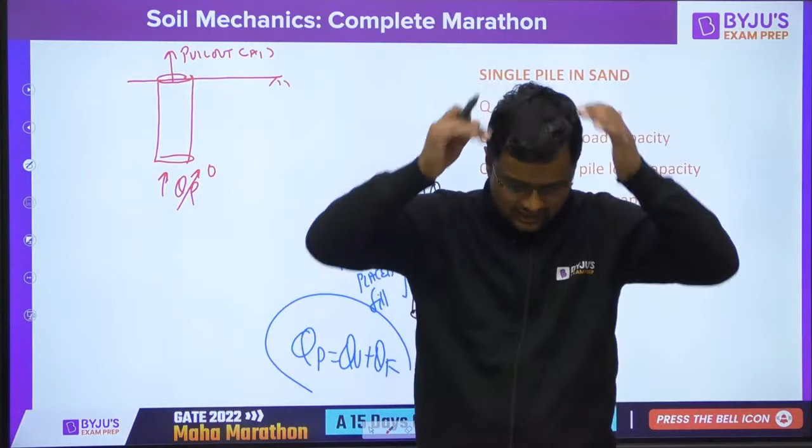No. If you are pressing me downward, reaction will come at my foot. But if you are pulling me upward, there will be no reaction. So if you press downward, there is reaction at the foot, but pulling upward gives no such reaction.

So at that time, only friction will be helping us. So the pull out capacity answer will be QF.

Now guys, let us come back. QU is equal to QP plus QF. Let us do this for sand.

QP for sand, point bearing, is equal to load, which is stress into area. Stress is Q into NQ, plus half B gamma N gamma, but this second term always has to be taken as 0 since N gamma is never given. So this is stress into base area.

QP acts at the base, so for a circular pile, the base area is pi by 4 d square.

NQ is the value that will be given to you, and the effective stress is calculated at the base of the pile. Effective stress variation is only taken up to 20d for dense sand and 10d for loose sand; thereafter it is taken as constant.

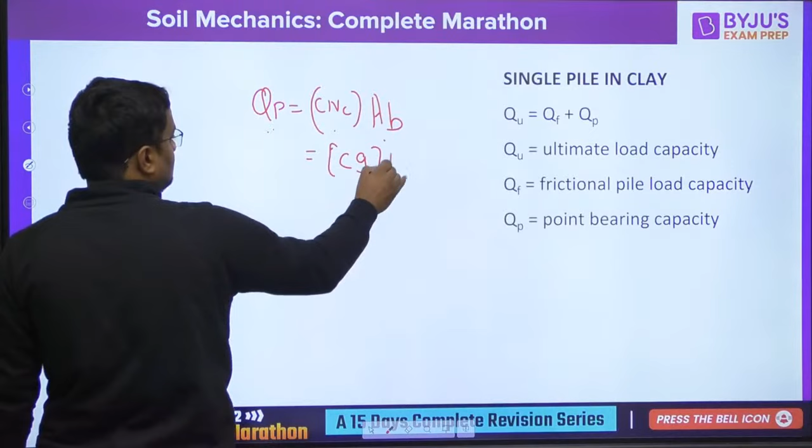Okay. What is K? That is given here for dense and loose. What is sigma bar average? That is average effective stress on the pile. Tan delta given here. Now clay, QP is equal to C into NC into area base. What is load here? Stress into area. If NC is not given, you have to take 9. C is the cohesion. What is QF? Stress, that is alpha C. Alpha is adhesion factor into C cohesion into area surface. So QF is stress into area.

Very simple. Now for group piles. Group piles are very easy, I am telling you the trick. For sand, if there are 16 piles, group capacity QUG is n times QU. Calculate for a single pile, I already told you how to do. If there are 16 piles, multiply with 16. If there are 25 piles, multiply with 25. For sand it is very easy. Calculate for one pile, then multiply it with number of piles.

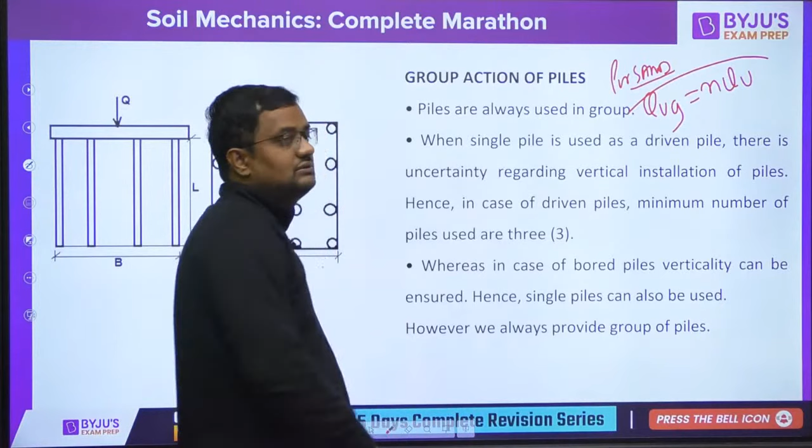For clay, I am telling you again, what is efficiency? Suppose N into QU. Very logical. Suppose there are 16 piles and one pile has 100 capacity, so 16 should have 1600. But suppose in group it only has 800 capacity due to intersection of pressure bulbs. So 800 upon 1600, that will be 50% efficiency. Efficiency is equal to 100% for sand, so QUG is equal to N into QU. For clay now also it is very easy.

I am telling you the trick. This is a group in clay, a very important trick. Just suppose spacing is S. This will be total 2S plus D. Spacing is S and S, so 2S, and D by 2 here, D by 2 here, so D. So for clay, assume this whole group as a single pile. The answer will come the same. Forget these 9 piles, assume this single pile.

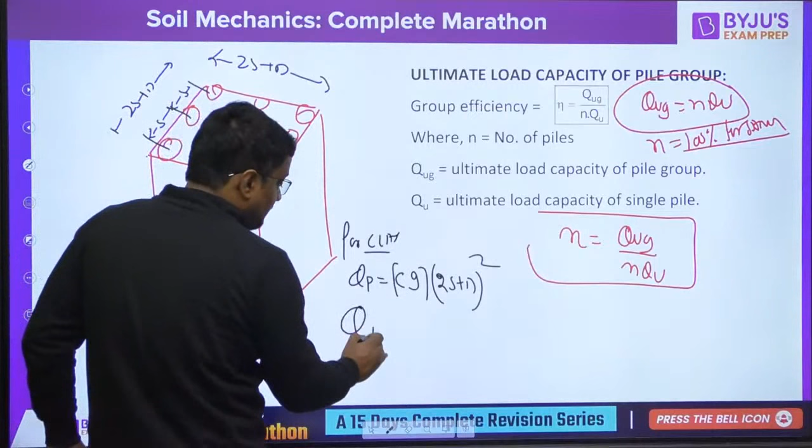For clay, QP is C into NC; if NC is not given, take 9, into area base. Area base will be this. Same formula for group as we have done for single pile, but take this whole as one pile. QF is alpha C; in case of group, take alpha as 1, into C into area surface. What is this area? 2S plus D into L, and the surface is 4 times that. And QP plus QF is equal to QUG for clay. And for sand it is very easy.